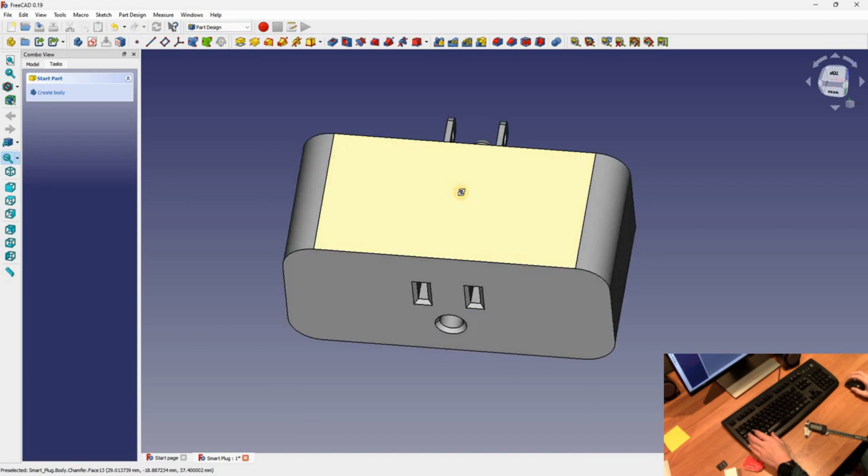Today we'll be designing this basic smart plug design. To begin with, open up your FreeCAD program, and it begins on this start page right here. What we're going to do is go to part design and press create new.

We have two tabs right here, the model and tasks tab, and we're going to create body, create sketch, and then select a plane to sketch on. It doesn't really matter which plane you begin your sketching on. It only affects the orientation that your part defaults to in any slicer.

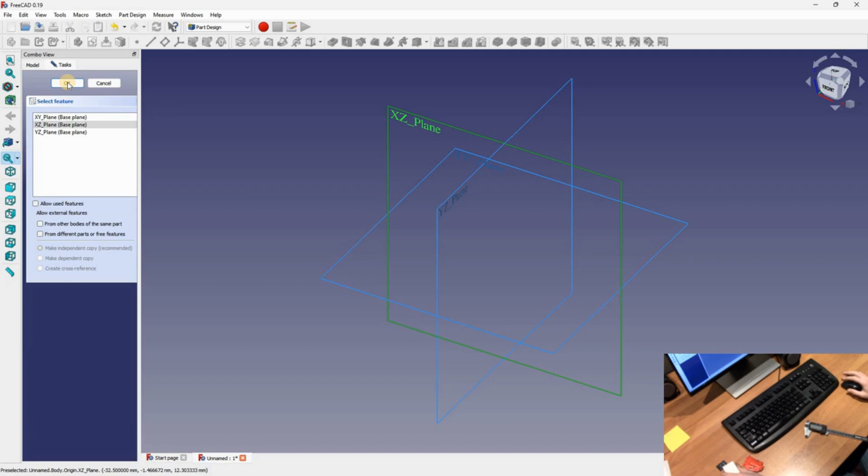So we have our basic XZ plane here, and we're going to start by creating a rectangle. This is going to be the basic smart plug design.

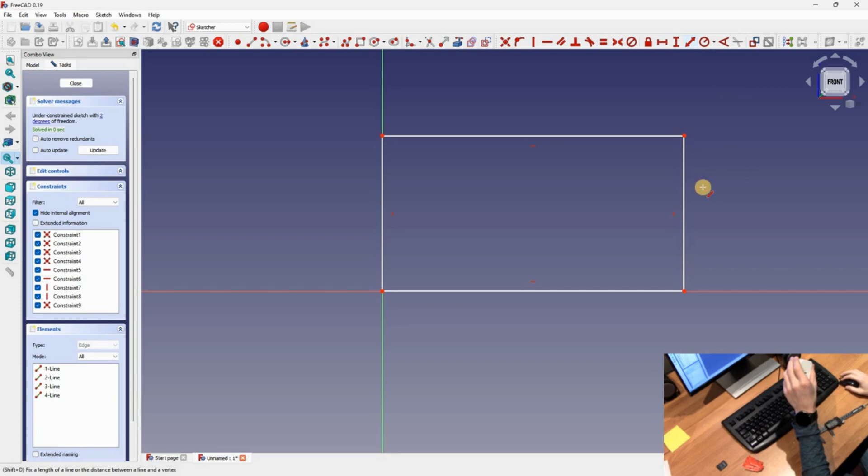First, let's measure the width with our calipers, and that is 37 millimeters. So we're going to take our length tool up here and type in 37, and then we're going to measure our width, and that's going to be 80 millimeters. Just type in that. So now we have this basic shape.

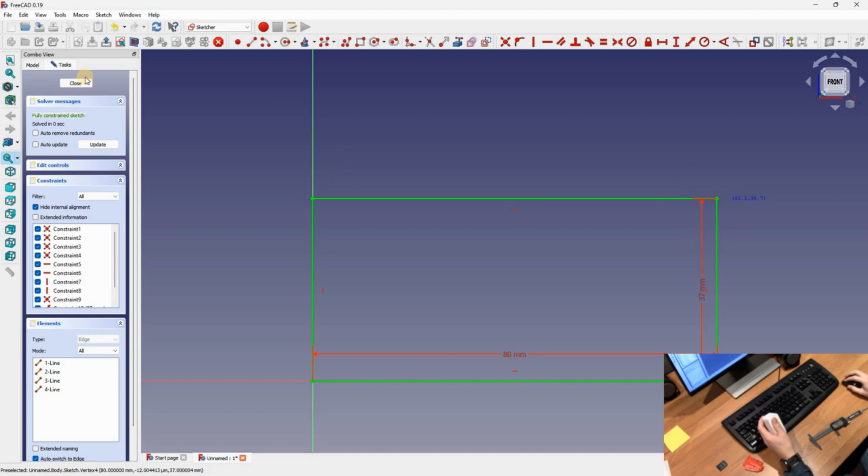Because it's all green, we know that it's fully constrained and none of these points or lines can move. So we can close our sketch, and some basic navigation: control and right click are to move it laterally, and shift and right click are to move it on its axis.

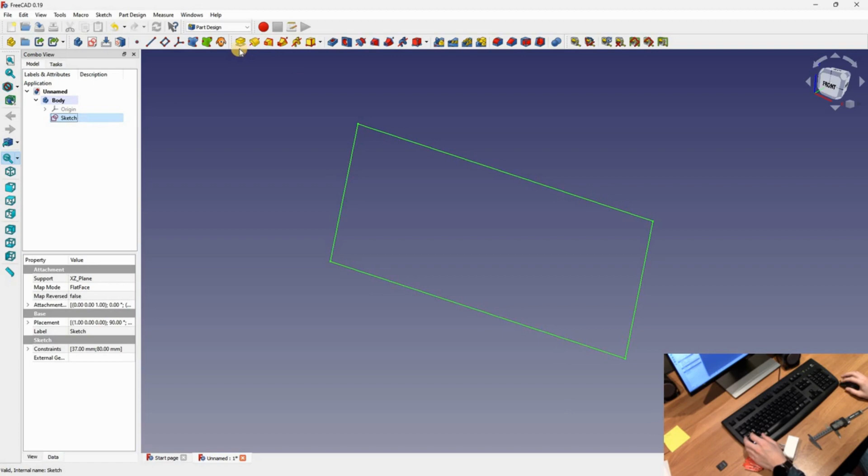So go on the model tab. You want to make sure you have this sketch selected and press the pad tool. So we're going to measure this width, which is 36 millimeters, and that will extrude the face outwards.

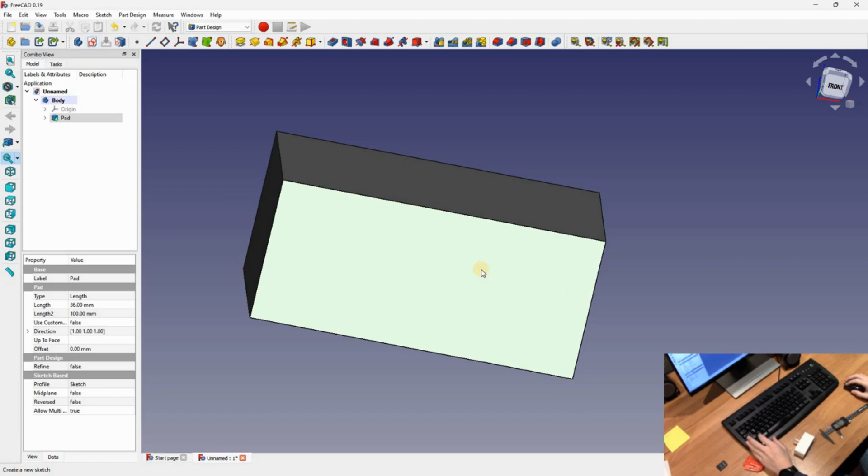So we now have this block right here, and we're going to start by designing the prongs on the front. We'll open the sketcher tool while having that face selected, and we'll need one circle for the round prong, and then two rectangles for the rectangular prongs.

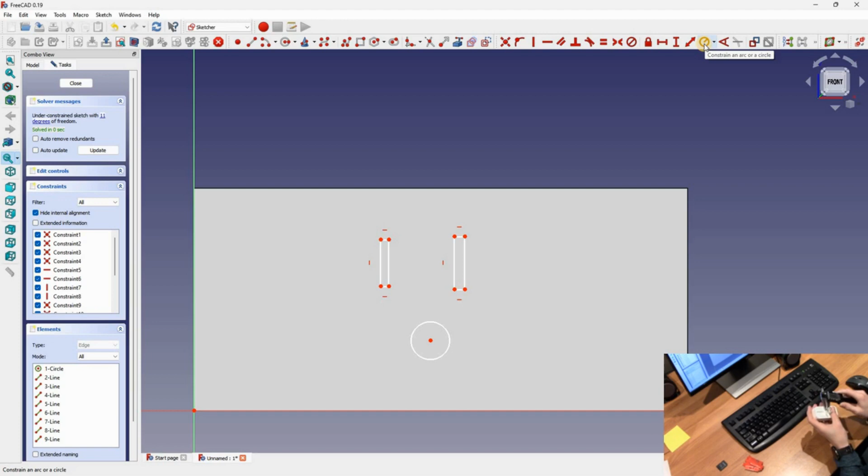To begin with, let's constrain this round one. So when we measure it, the diameter of the prong is 5 millimeters, and FreeCAD measures circles with the radius, so we just have to divide that 5 millimeters by 2. So we have 2.5 millimeters.

So now our circle is fully constrained in its shape, but not in space. Next, use this tool that looks like a blue box to make these edges constrainable. This means that we can now use these edges and points to constrain our objects to them.

So use the horizontal measurement tool. We want this circle to be in the exact middle of our rectangle, and we know that this length is 80 millimeters, so we can just divide that by 2, and the width will be 40 millimeters.

To find how far the prong is from the bottom of the smart plug, we can use our calipers to measure that, and that is around 8 millimeters. So what we want to do is use our vertical measuring tool to measure the center point of the circle and this bottom line. So we can use the origin for that.

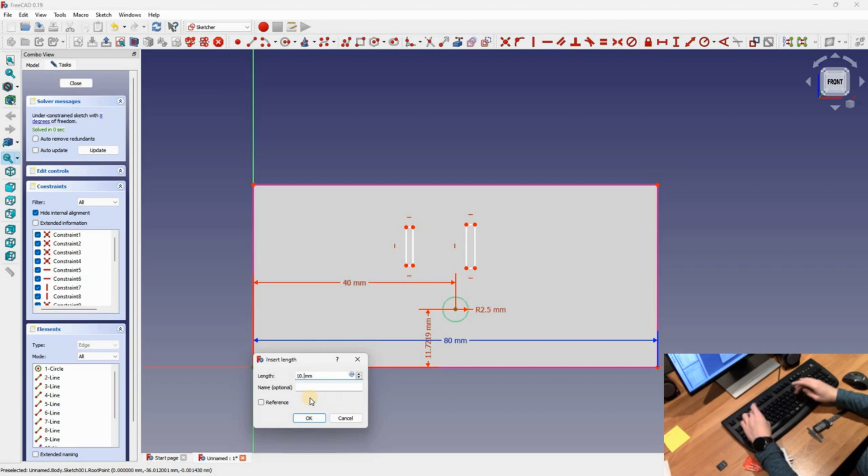Now, we know that this bottom of the circle to this line is 8 millimeters, but we need to add the radius of 2.5 millimeters. So that will be 10.5 millimeters.

Next, we know that they're the same size, so I'm going to use an equality constraint to make the rectangles have the same dimensions. Now that they have the same dimensions, we need to find their width and length. So they are each 1.5 millimeters wide and 6.5 millimeters tall. So we can use our length tool to input those values.

Now we can find the distance between the two prongs, and that is 11.25 millimeters. So we can use our horizontal constraint tool.

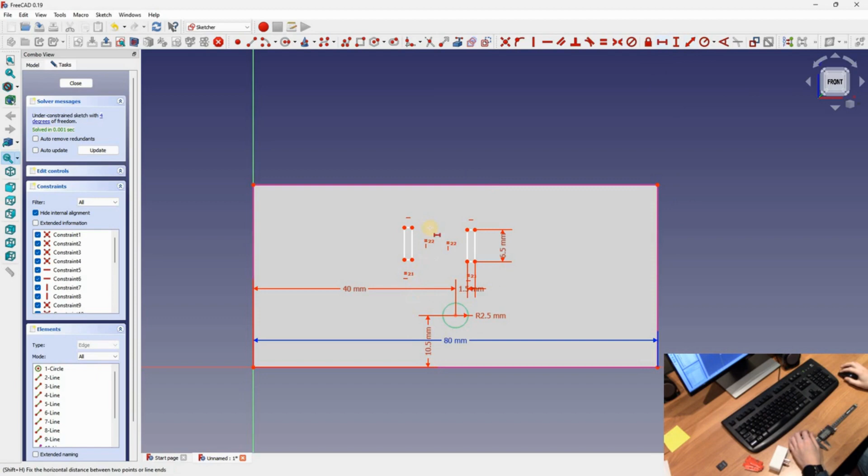Lastly, we want to constrain these vertically, and we know that they're perfectly in line, so we can use our vertical constraint tool and make it 0 millimeters. This will make sure that they're both in line.

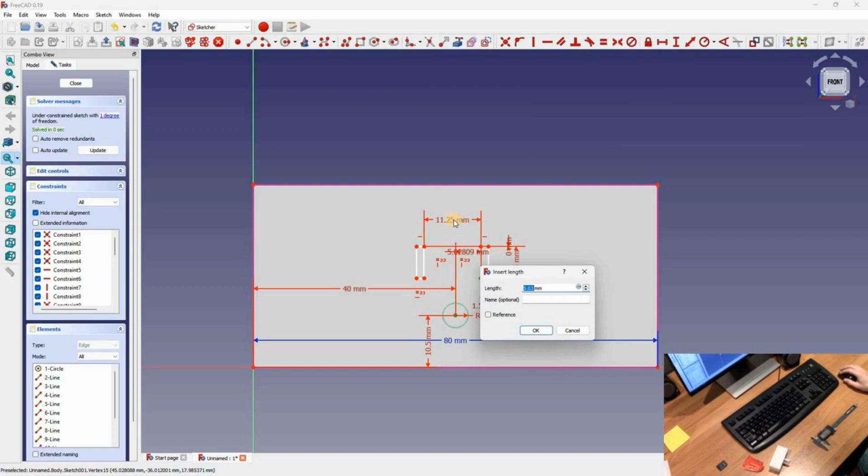So now they're fully constrained, but not in space. So we can use this point right here because it's fully constrained, and we know that it's in the middle of the rectangle. We can use this point to constrain these in the middle. So we can use our horizontal constraint tool to find the midpoint of this, which is 11.25. I'll just divide that by 2 on a calculator. That is 5.625 millimeters.

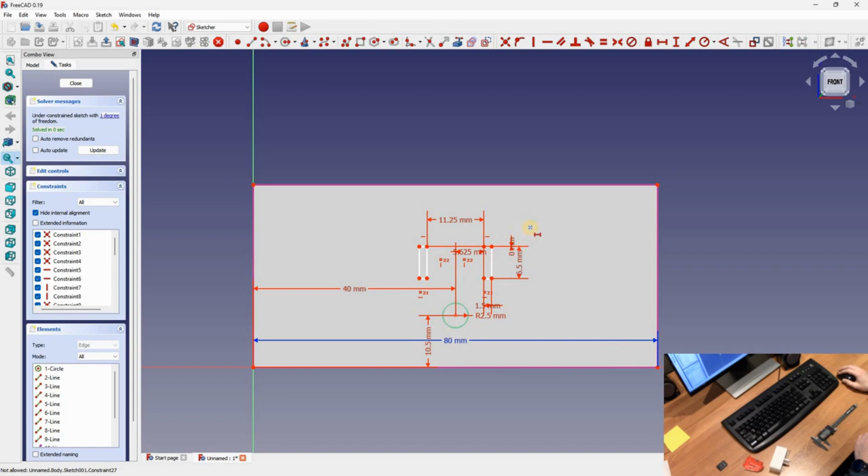Alright, so now we know that this is directly in the middle, and now we can measure the top of the prong to the top of the smart plug, and that is 12 millimeters. So we can use a simple vertical constraint to make that 12 millimeters tall.

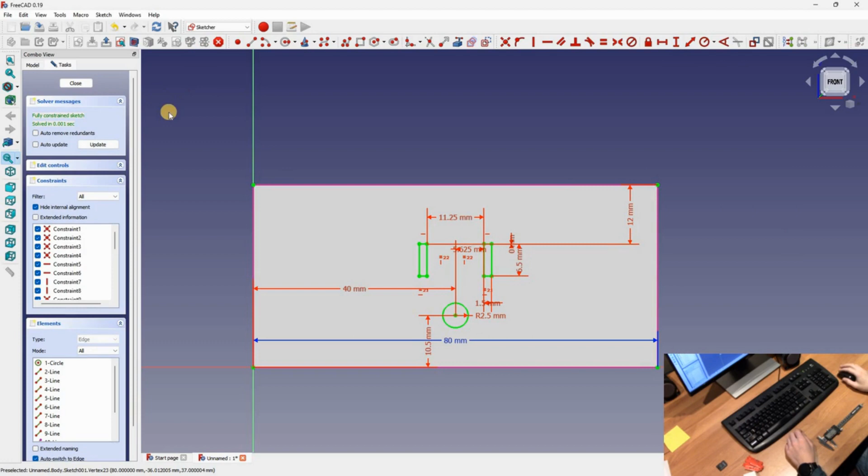Alright, it's fully green, so we've fully constrained our sketch. We can now use the pad tool.

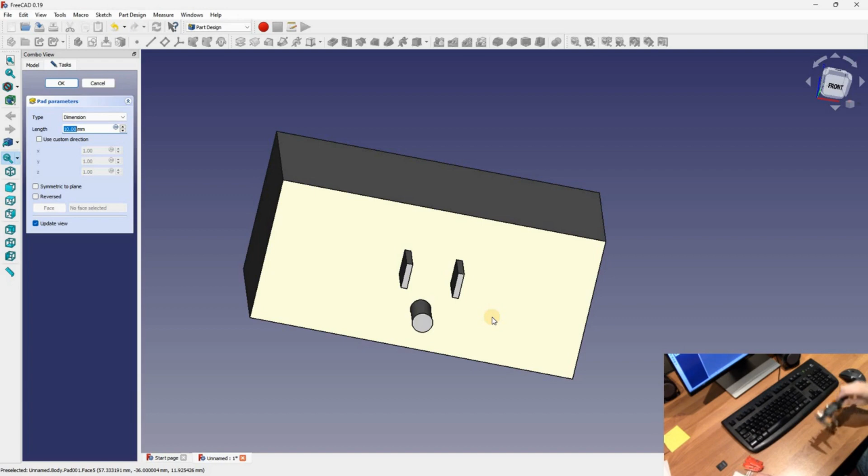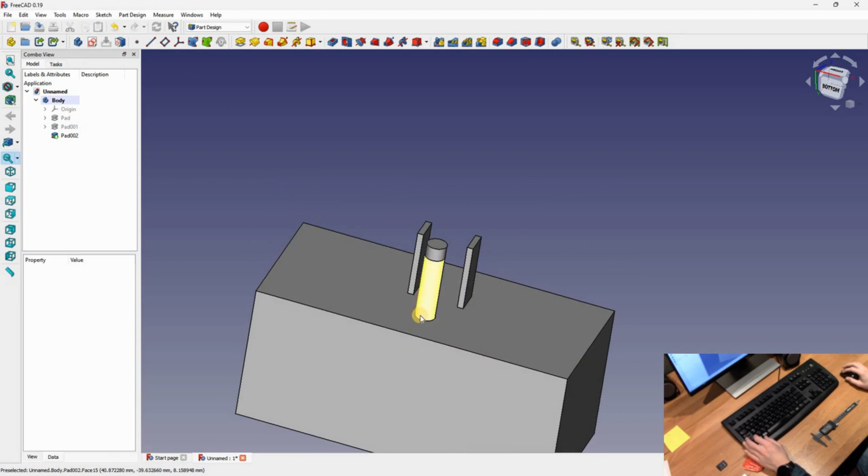Let's measure the height of the prongs. The rectangular prongs are 17.5 millimeters tall, and the round prong is 21 millimeters tall. So first, let's put in our dimension of 17.5, and then we'll add our height on the round one until we get to 21, so that is 3.5 millimeters. Now the round prong is 21 millimeters tall, and the rectangular prongs are 17.5 millimeters.

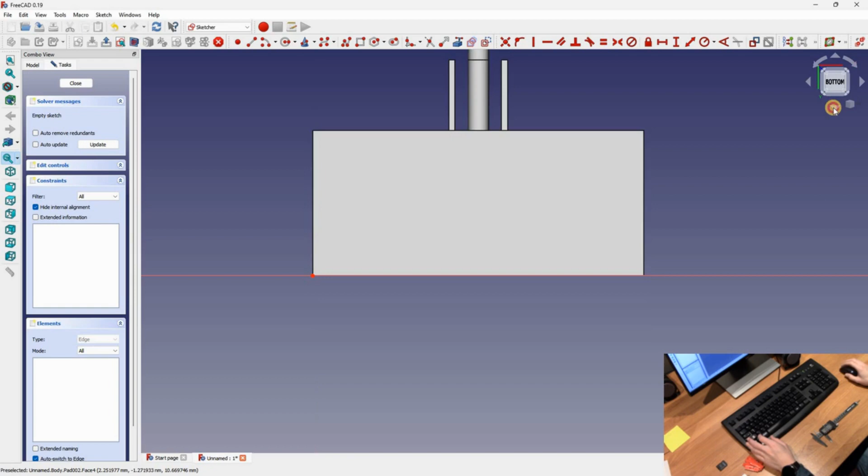Next, let's make a sketch on this side right here using this sketching tool. Instead of sketching out our circular prong and rectangular ones again, we can use our previous design to make these lines constrainable. Sorry, I selected the face—it'll give you an error message if you do that.

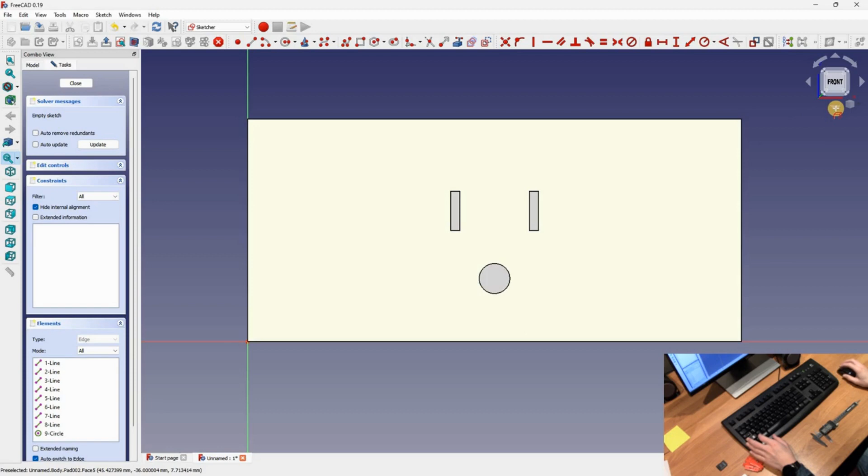The red lines do not show up right now because it is showing them on the sketching plane, not the plane that we were on. So now that we have this, we're going to make the holes 0.5 millimeters larger than the prongs that we designed.

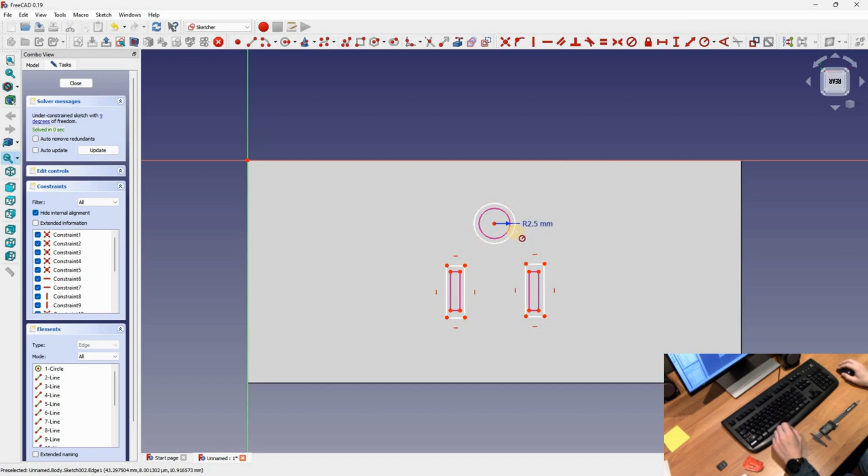So let's add our circle and our rectangles. Now we know that the radius of this circle is 2.5 millimeters, so we can make the radius of our new circle 3 millimeters. Now we can use our horizontal and vertical constraints to make our new rectangles 0.5 millimeters larger on all dimensions.

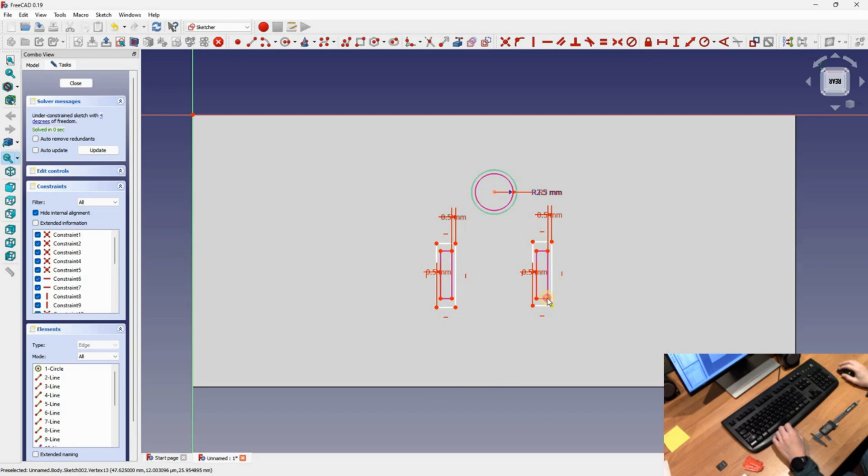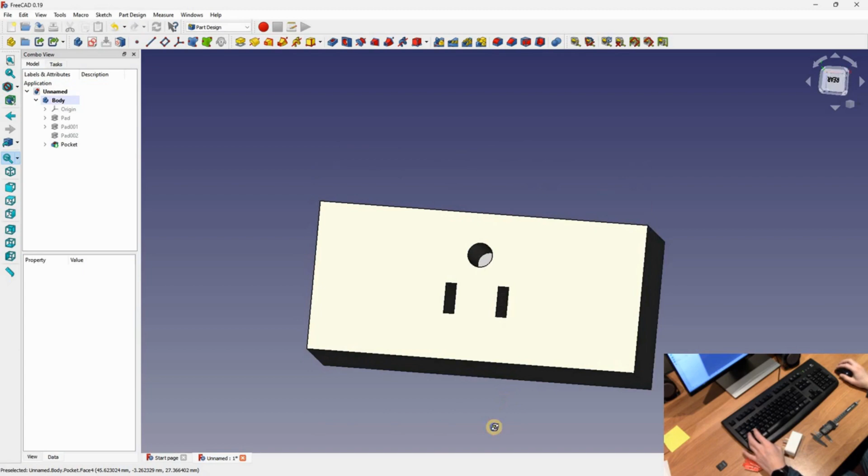They're all green, so we know it's fully constrained. We can close the sketch, and now we're going to use this pocket tool to extrude those back, creating a hole. I'll just make that 21 millimeters, which is the largest length of our prongs. So now we have that hole there, and we have our 3 prongs.

Next, let's put some fillets on the outside corners. So we're going to select those, and remember to hold Control as you select multiple lines.

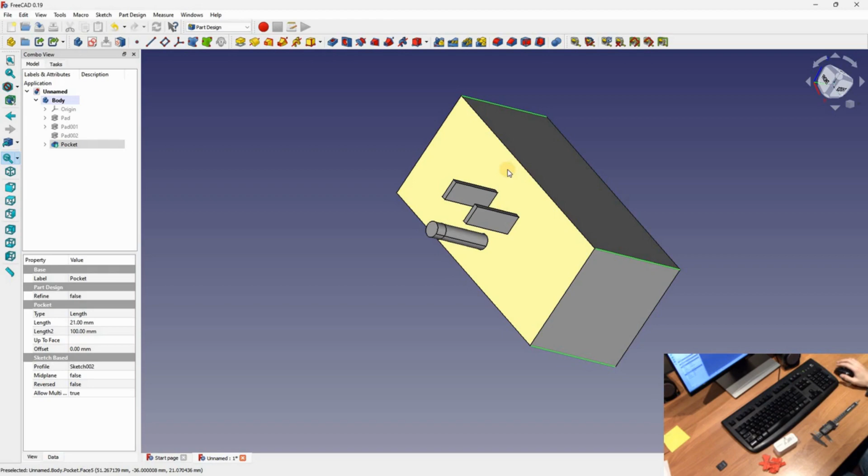To find the fillets that we need, I have fillet gauges here. Depending on which gauge fits best, that will be the size of the fillet you need. It seems that 16 millimeters fits the best. Now these fillet gauges are in the diameter of the fillet, so since FreeCAD measures their fillets by the radius, we're going to need 8 millimeters of a fillet.

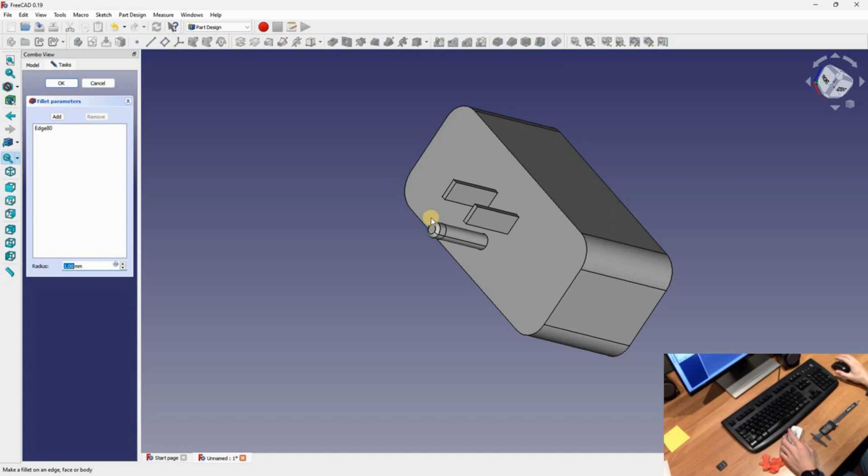The fillet is just the rounded corners here. So now we're going to put a fillet on here, making it rounded over just like the plug. You can select the edge, make a fillet, and since we know the radius is 2.5 millimeters, we can make the fillet 2.5 millimeters.

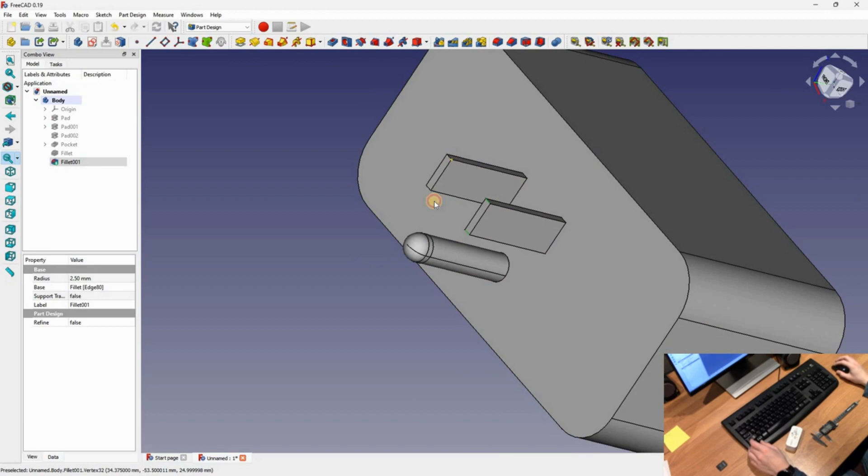Next, let's put some 1 millimeter chamfers on these edges. Chamfers are kind of like fillets, but they're just straight. At the front of the plug, we're going to put a 1 millimeter chamfer on these edges.

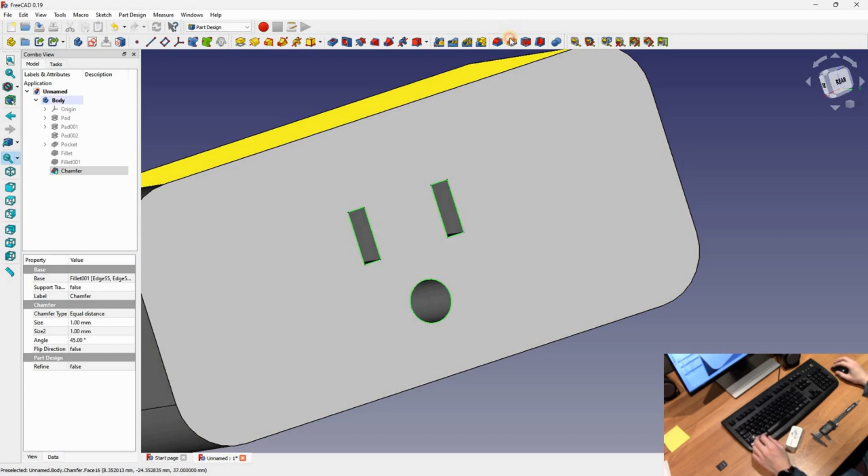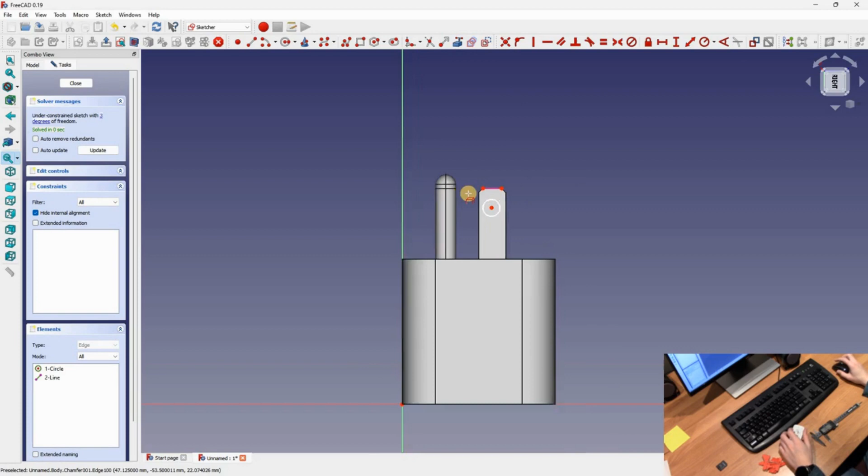Lastly, we're going to put a sketch on this face, and then put our hole through the prongs. Let's use this tool to make these edges constrainable. So the diameter of these holes is 3 millimeters, so that would be 1.5 millimeters in the radius.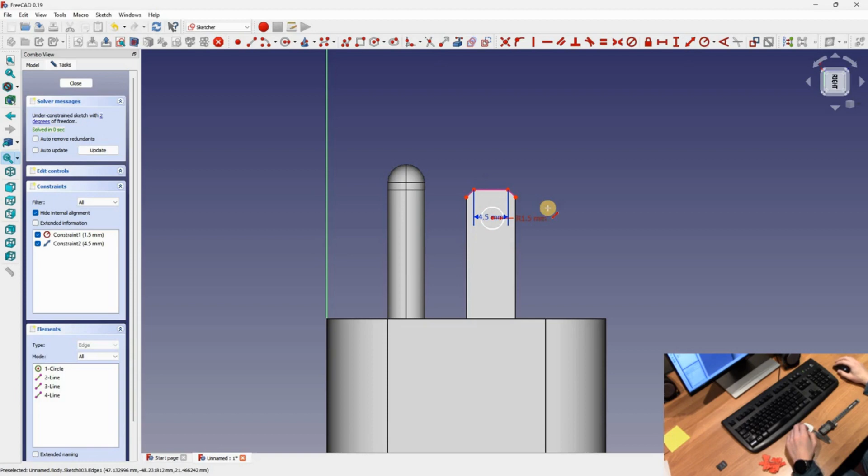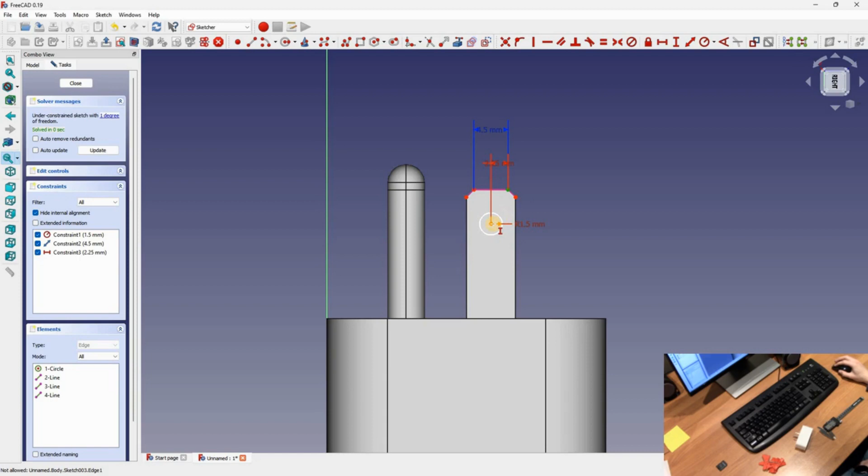We know it's centered, so we can measure this length here, which is 4.5 millimeters, and then have the horizontal length of 2.25 millimeters. Next, we need to find the vertical height, and from the top of the hole to the top of the prong, it is 4 millimeters. So in order to get the top of the prong right here to the top of the hole, we're going to have to add 1.5 millimeters, which will be 5.5 millimeters.

Okay, you can close the sketch and pocket that, and then just make that through all. Alright, and there is your smart plug.